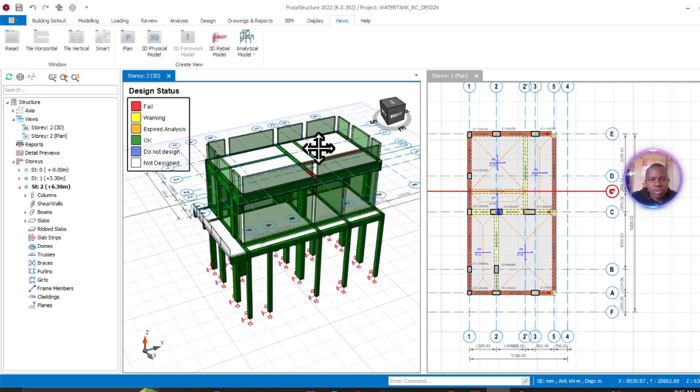Supporting 6 water tanks on top. So let me just take you through its architectural plan. It may look like a simple design, but it's not, because of some constraints and its rigid design from the architect. It cannot be modified because we don't have a lot of ample space to work with.

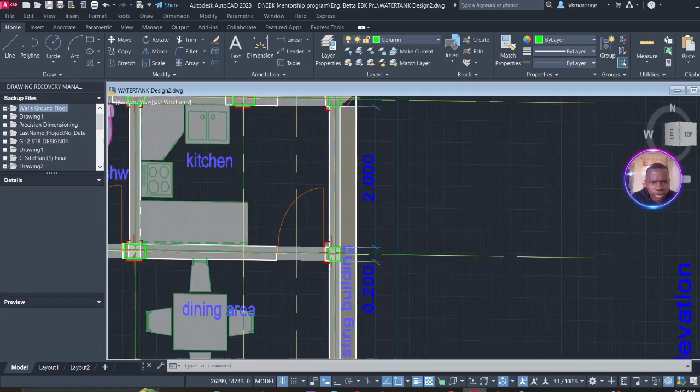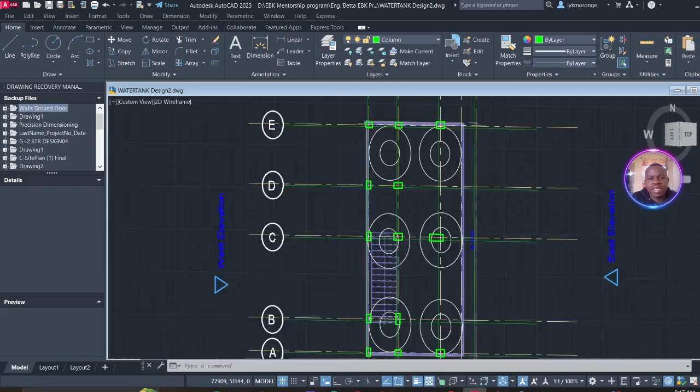As you can see from my drawing, they have indicated we have an existing building just adjacent to this wall that we are doing here. So having said that, you can see the 6 water tanks that will be seated on top here. And these 6 water tanks will be transmitting a lot of weight onto our structure. So the means of transmitting the weight of these water tanks down into the ground is what is making this design more technical.

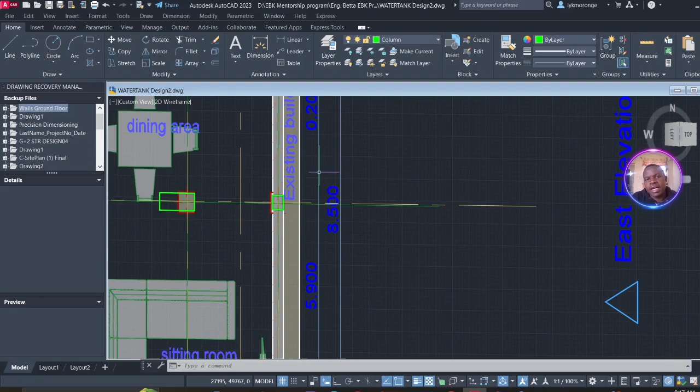So having just shown you that, I can also show you this as the general arrangement drawing that I've drawn, and you can also remember that some of the columns will be terminating as we move into the second floor, as you can see here, because remember that we have an existing building here, and this building has some eaves of the roof. So we have to leave some space so that we don't end up removing the eave of the building.

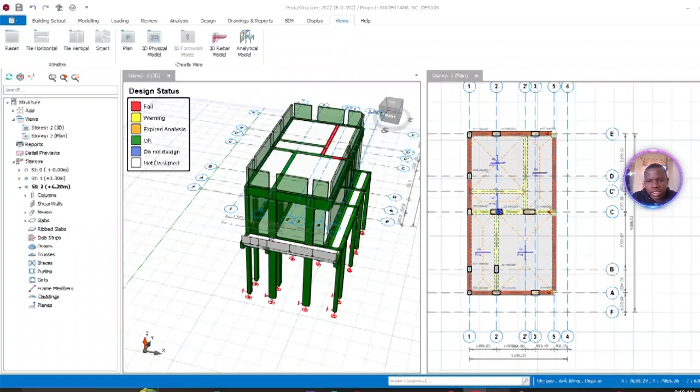So once we come to our first floor, we will shift our beam a little bit. So we'll be having a cantilever design. So you can see how this is going to be a bit challenging design to work with. So if we come back to ProtaStructure, you can see that our failure mode is likely to happen at this point, just from our first analysis. However, this is what we want to look at, that we work around and fix it in this design.

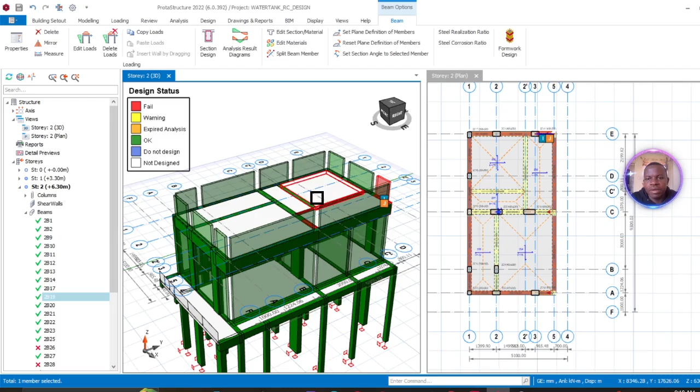So before we get started, let us just understand the amount of load that will be contributed by the 6 water tanks here. So we are just doing a design analysis of our model so that you understand what you are going to work on. So in CAD and BIM, we don't just model or design, we do it practically. Like this is a project that I'm working on that is going to be implemented on the ground for a client. So in fact, we are not just practicing, we are doing something that is very practical. So having said that, let's go and see how we can calculate this loading that will be coming on here.

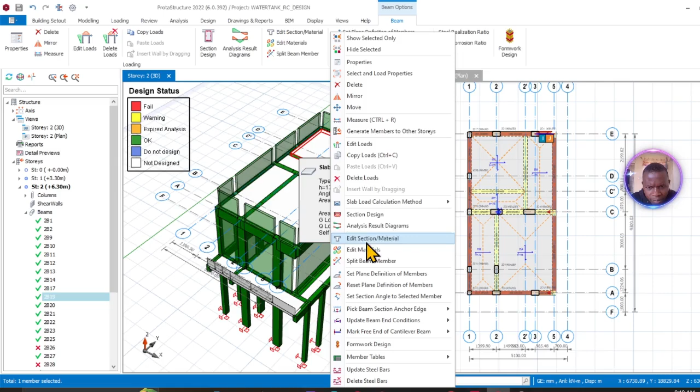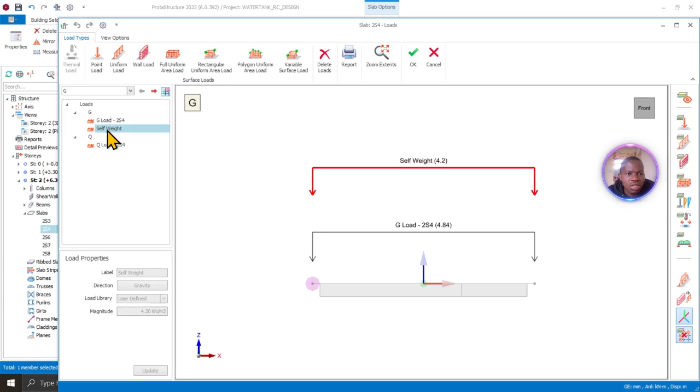Before we get into that load, I can simply right click it and check it. If we come here to edit loads, this is the dead load, you'll have it as 4.8. So we have 3 types of loads. We have dead load, which is here, which is 4.8 kilonewton. And then we have the self weight of this building, which is here. And then we have the live load here, which you can change its magnitude as 27. So we have it here.

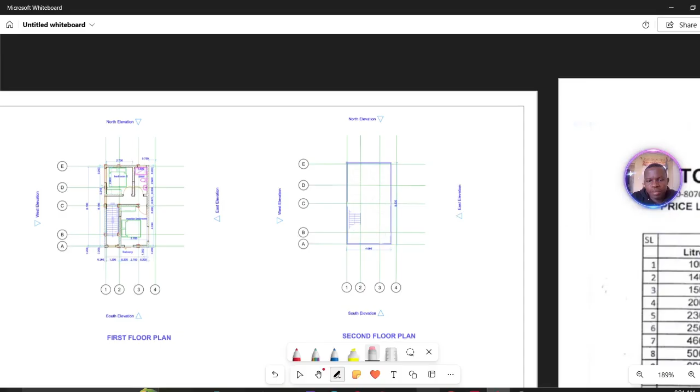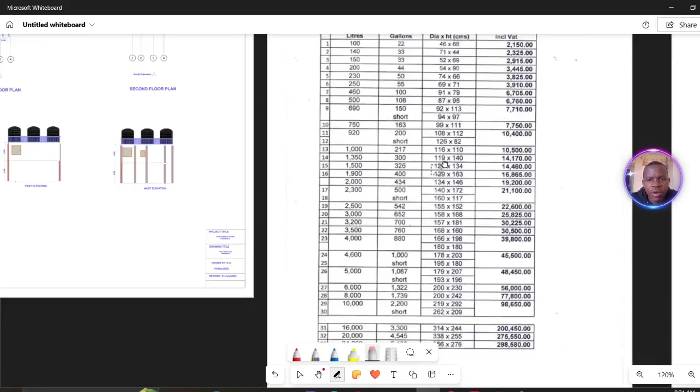So just to show you how we can calculate these loadings that are coming on top of our building, there is something that I've prepared here, as you can see. So these are the 6 water tanks. You have to get the diameter of the water tank and the height, and from that you can calculate the volume of the water tank. And with me here is the specification of these tanks from the manufacturer that makes the standard water tank. So we are going to use a 10,000 liter tank, as you can see here.

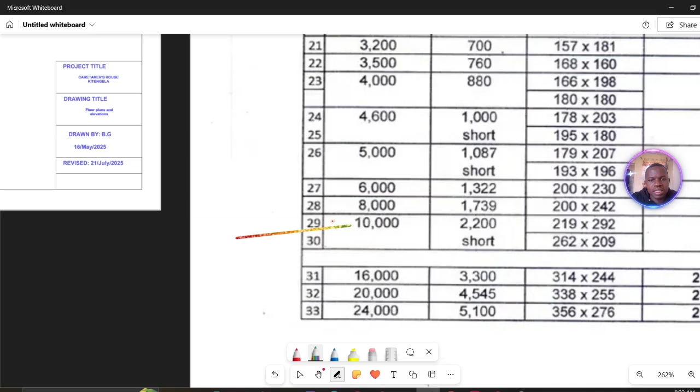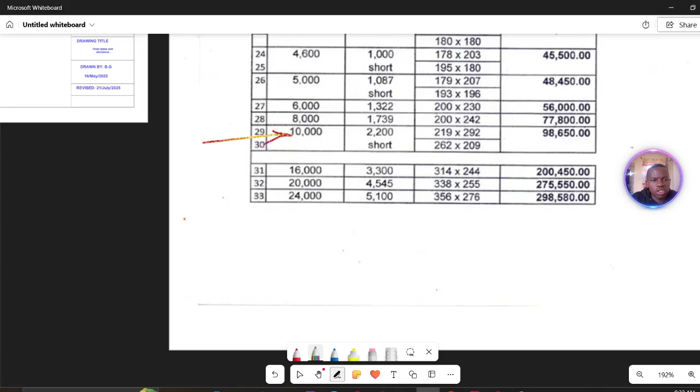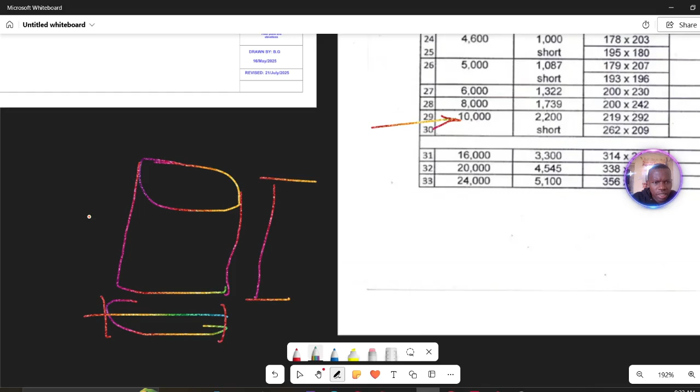And you can see with this tank, we have a longer tank and a shorter one. Let me just demonstrate here. There are some tanks which will appear to be a bit shorter, meaning that the height is short, but the base is quite wide. So those are called shorter. And they also manufacture those which are longer, where the diameter becomes smaller, but the height becomes longer. These are the longer tanks.

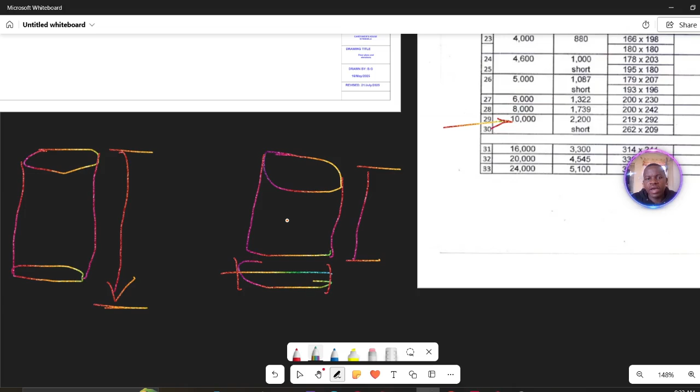So obviously, you know that pressure will increase with height. So if we adopt these longer tanks, we're going to get a different pressure here as compared to when you adopt the shorter tank. I'm just bringing the engineering aspect into this design so that we actually get it right from the engineering perspective.

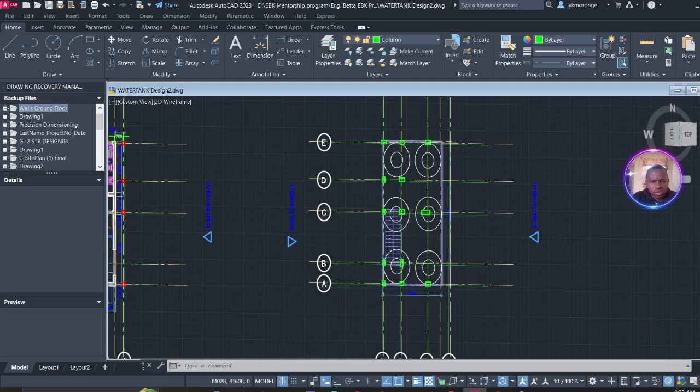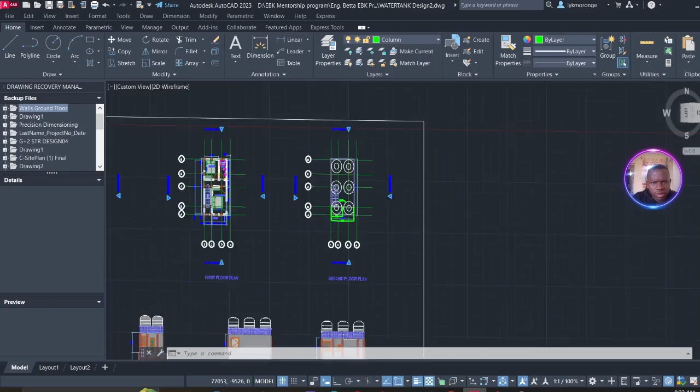And having said that, when we come to our drawing, let's just see if the space on the architecture will allow us to put these tanks here on top. So if we go to our AutoCAD and check the dimension, we realize that we have a restrained dimension that will only allow us to adopt the longer tanks, because the space here is not sufficient. Yes, you can see here. So this is the diameter of our tank, as you can see here.

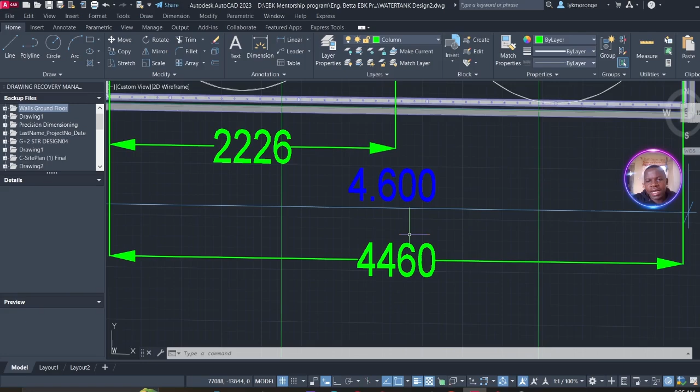So this is the width of our roof, and obviously this one will be the length. For that, we don't have a sufficient width of 5 point something to accommodate the wider tank. So we are going to adopt the narrow tanks. If you have a space of 4.6, that's the very basic 4.6 as our width, then we have tanks that can occupy a maximum area of 4.3, so that will be sufficient. So we are adopting these measurements.

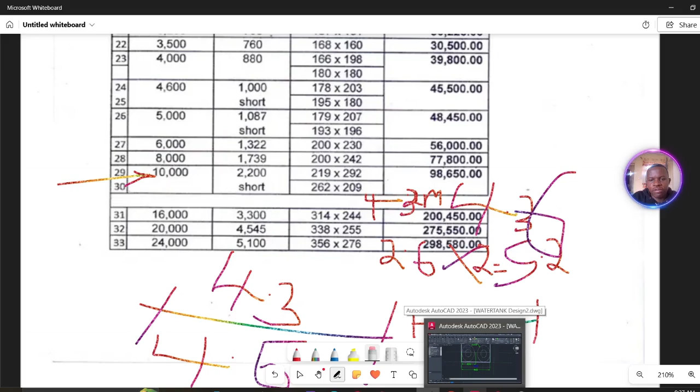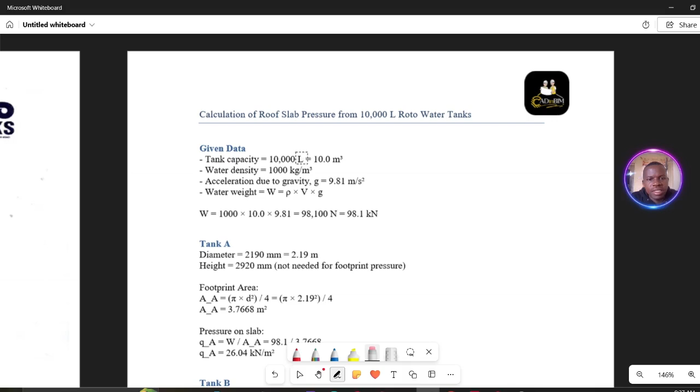So by adopting these measurements here, let me just clean up. By adopting this measurement, we have to calculate the amount of pressure exerted on the slab roof. To do that, I've already done the calculation here. Let me just take you through so that you see. If you have a tank of 10,000-liter capacity, which will translate to 10 cubic meters, and if the density of water is 1000 and the gravity is 9.8, then you can easily get the total weight.

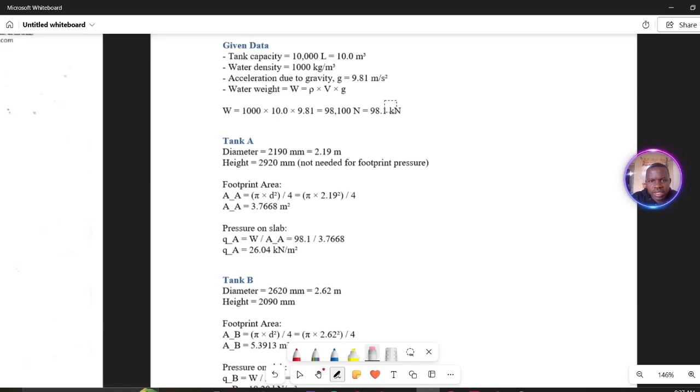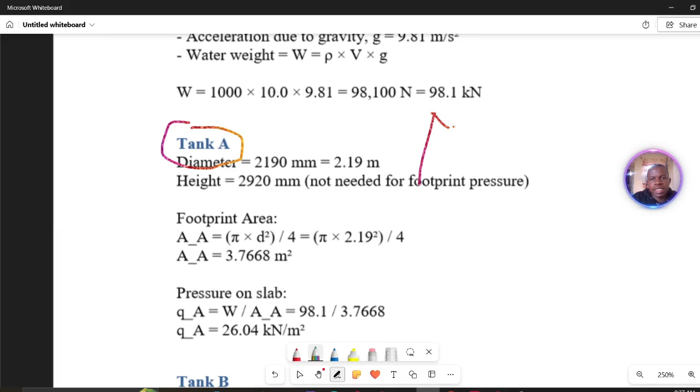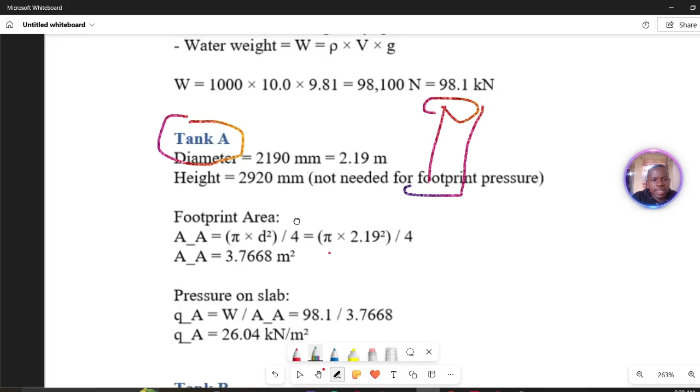If we get this weight as 98.1 kilonewton, then with the weight here, we can now calculate the area of our tank. Remember, these are the dimensions of our tank. This is tank A. Tank A is the longer tank, or the tank which has a longer height but a smaller base, which will be accommodated on our slab. So you can calculate the area here by using pi d squared, the area of a circle, and you get it as 3.77. Having gotten your area and your load, you can now calculate the pressure exerted.

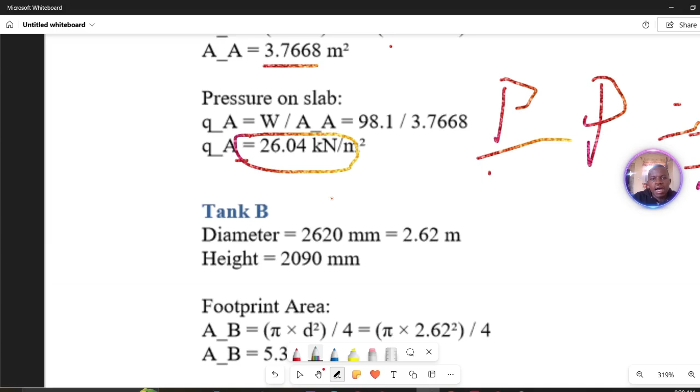And this is how you calculate the pressure: pressure will be given by force, coming in the form of kilonewtons, over area. So if you do that, you can get this pressure here, which is our load that we're going to transfer to ProtaStructure for design. If you get it as 26.04, we will adopt 27 kilonewtons per meter square just to be on the safer side. So this is the load that we're going to adopt.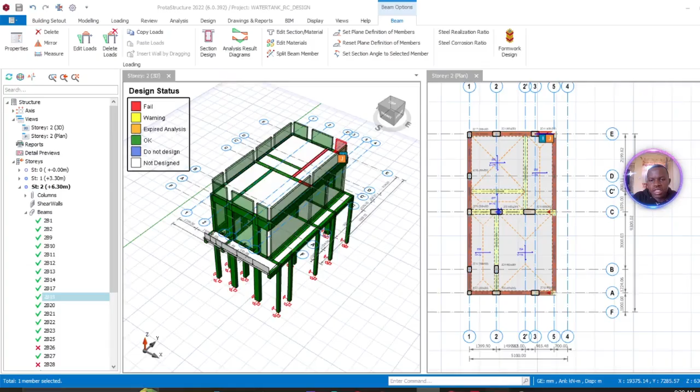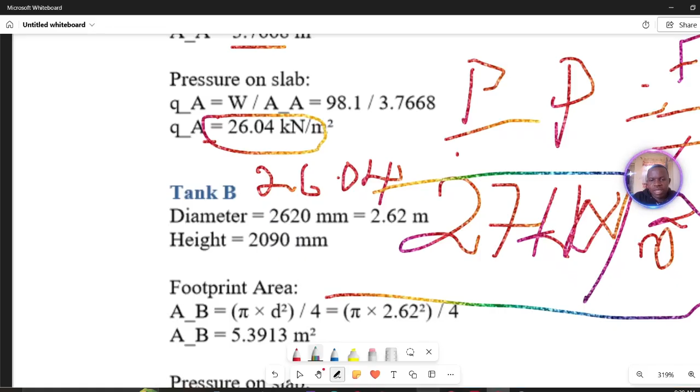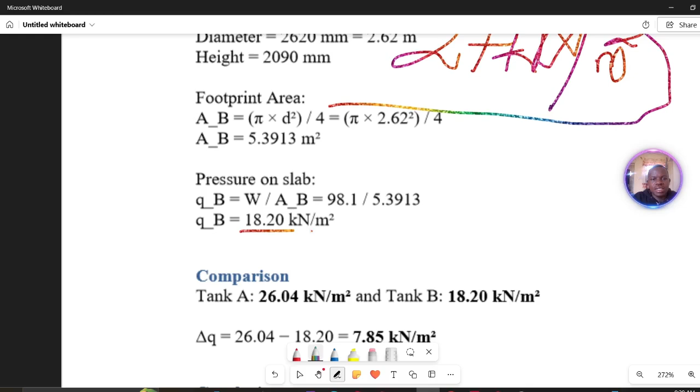So you can imagine the amount of weight that's coming on top of this structure. It's quite a lot, and we have to see ways in which we're going to design. And remember that some of the columns are also terminating here. So it's really a challenging design. It's not as simple as it looks. Having that in mind, just to mention something, I also did this for tank B to see what the difference could have been if we had adopted tank B with a wider base, and I noted that its pressure will come to around 18. You can see that difference, around 8 to 10 kilonewtons.

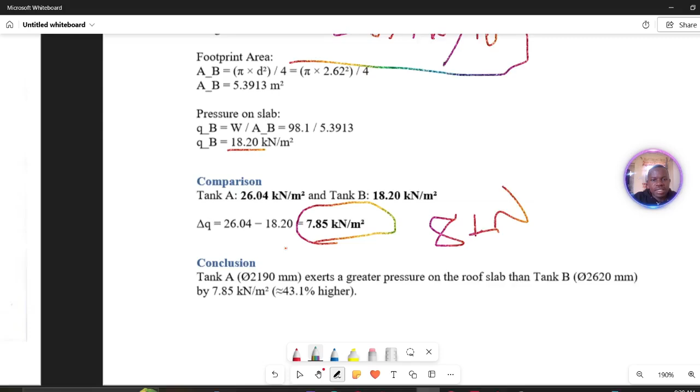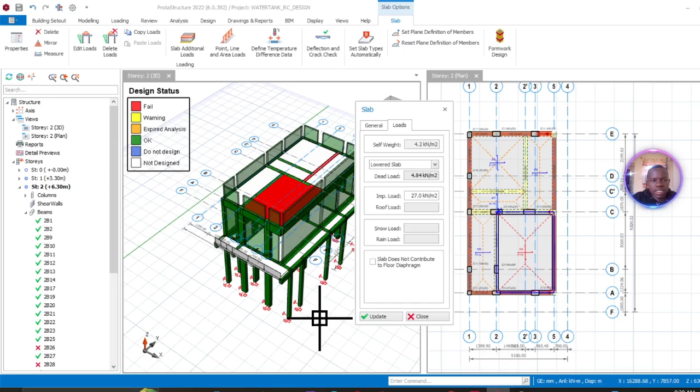So with that being said, you can now proceed to ProtaStructure and check that when you come to our loading here, just right click and then go to properties. You can see the live load that we inserted under loads. Let me just bring it here. So under loads we have this live load as 27 kilonewtons. You can see this 27 is what I've actually used. And if you use that with the current members that I'm using, there will be a failure. So now I'm going to see what I can do, either increase the member sizing or add some more reinforcement, to fix these beams that are failing on this side.

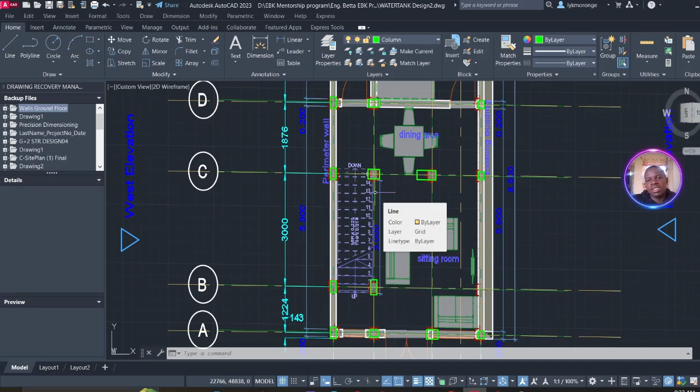You can even see the columns that I've chosen here. They're not of the same size. You can see these are 200 by 200 columns. This is a 650 by 250 column. I've tried to really optimize this design so that it meets the cost constraints and also meets the design preferences, desires and constraints on site.